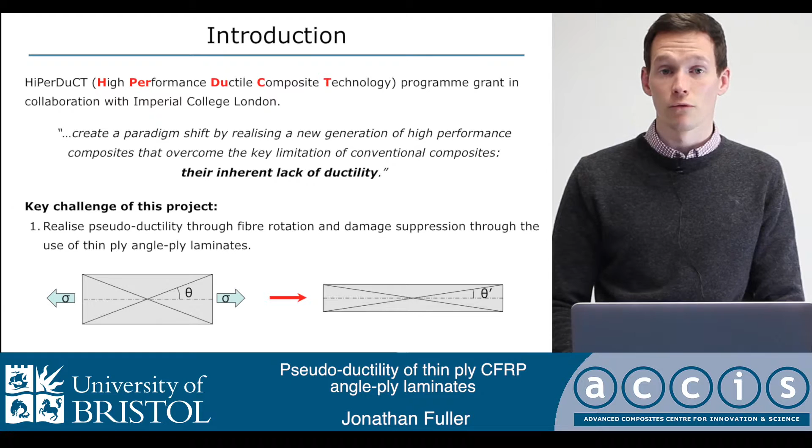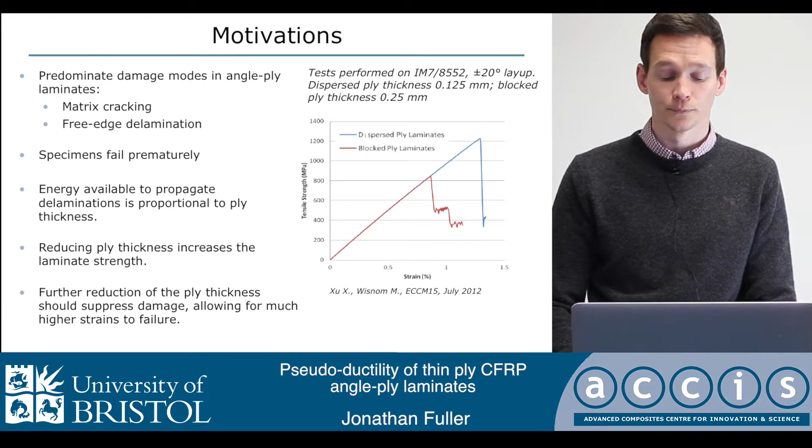So the material I've been using for this work is a carbon fiber epoxy prepreg of 0.03 millimeter ply thickness. The thing to note here is it's a very low volume fraction of 42%, which then leads on to the rather low Young's modulus shown by the mouse. And the other thing to note is all the strains have been captured using video extensometry.

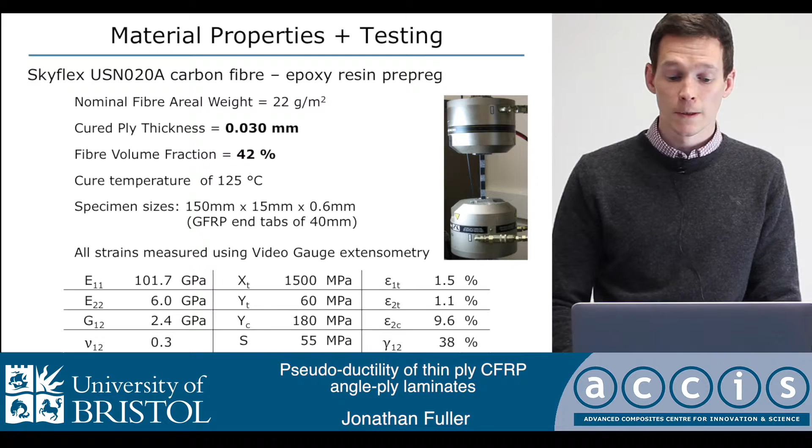So initial results characterizing the material showed that this is a plus or minus 45 laminate, and here we've got highly nonlinear response with strains in excess of 20% to failure. Also, the inset picture shows that there's large necking at the end tab region, which is a metal-like behavior, showing something similar to what you might get in a ductile material.

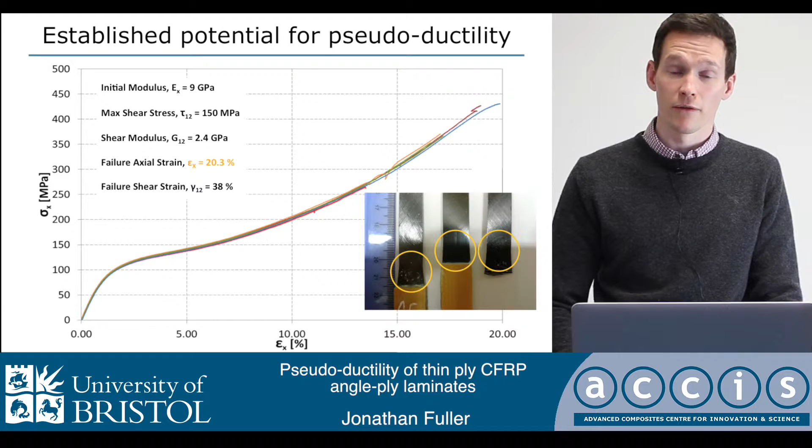The thing to note, though, is that the initial modulus is only 9 gigapascals, which is low. So the idea we wanted to try was, can we create a similar behavior but increase the initial modulus? So experimental testing and then analytical modeling showed that it is possible to do this with this material using a plus or minus theta 5 symmetrical configuration.

So in the graph there's 25, 26, 27 and 30 from left to right shown, and then CT images on the right hand side of a plus or minus 30 and plus or minus 45, both showing that there's at failure absolutely no large scale damage in the specimens, which told us that this concept does actually provide the results that we wanted.

So homing in on a particular configuration, I chose plus or minus 26 degrees, and you can see here Young's modulus is 35 gigapascals and the strength of 950 megapascals. And then the epsilon D at the bottom there of 1.4%, that's a pseudo-ductile strain, which is very promising.

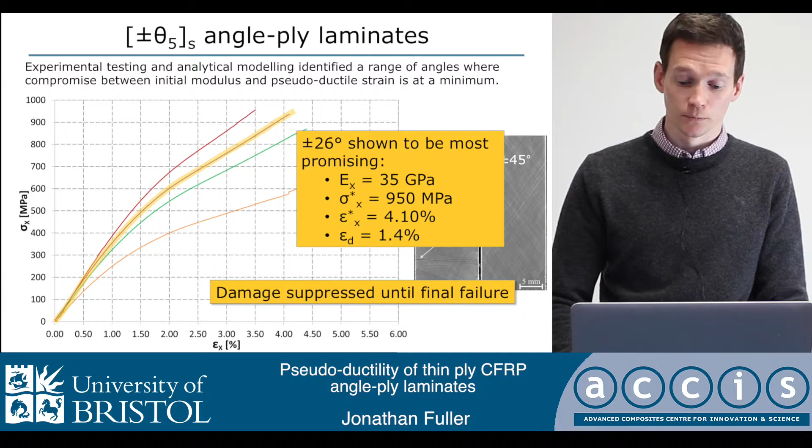So moving on, we decided that we'd combine two aspects of HiPerDuCT's work. My work with the nonlinear angle-ply laminates, and then other work which has been done by Czel and Wisnom on glass-carbon hybrid laminates, and using a thin ply carbon of the same material that I've used.

The nonlinear stress strain curve that they managed to produce is shown on the right, the lower stress strain curve, and then the picture at the bottom shows the sort of tiger stripe pattern, as we're calling it, which indicates that the carbon layers are fragmenting and then delaminating locally around the fractures of the carbon, but not propagating and not joining up, which is a key point which creates this tiger pattern.

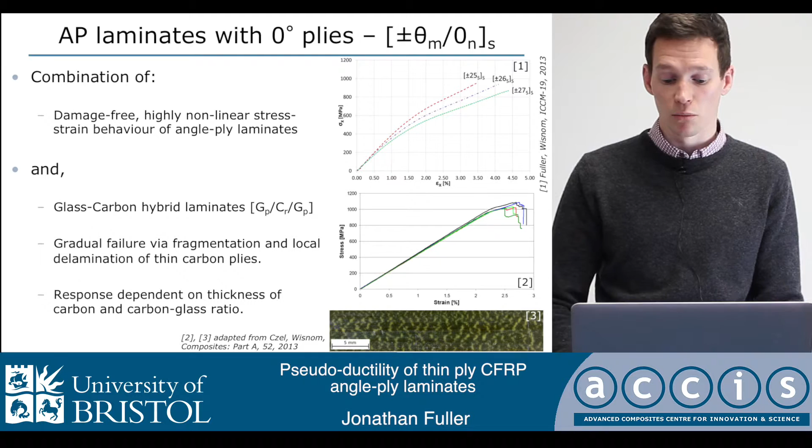Now, this behavior can be adjusted or tailored depending on the ratio and the absolute thickness of the carbon and glass ratio. So it gives great control over the behavior and then the stress strain curve that we can produce. So coupling these two, we get a response very much like the one shown here, a metal-like stress strain curve with an initial largely linear loading up to about 2%, and then a plateau 700 megapascals up to in excess of 800 megapascal strength after further loading.

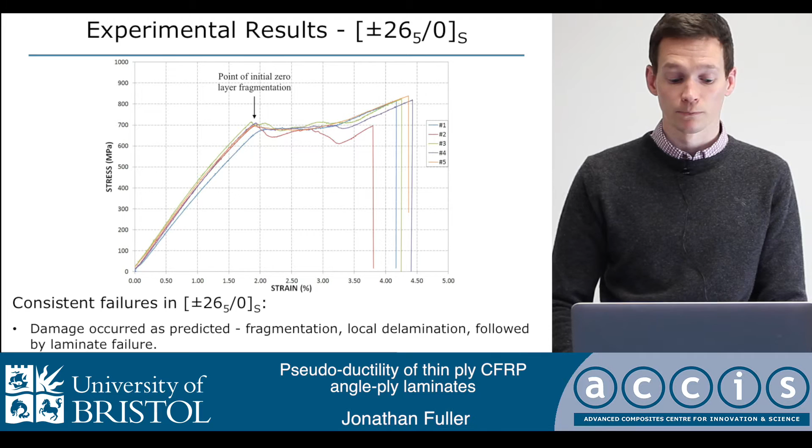This further loading takes place after fragmentation and delamination of the zeros, and then the angle-plies, which remain relatively undamaged, continue to take the load up to a failure which is similar to the value of the angle-plies by themselves. So obviously, how do we know what damage is in the specimen? It's key to know that and how it develops.

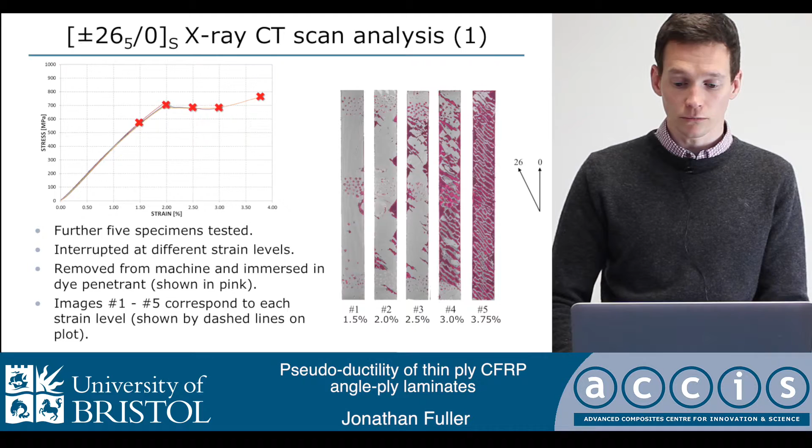And then zooming in on these specimens further, we were able to do a higher resolution scan on the two shown on the left. And this gives us a bit more evidence of fragmentation. So the yellow and blue insets on the central image show, hopefully you can see these lines indicated by the mouse, and their fragmentations in the center of the specimen in the 0 degree layers.

To the right of that, we can show that the specimen which has been loaded up further has actually developed these large white areas of delamination where the dye penetrant has got in. And also another key aspect of this image shows that the damage is solely residing in the midplane of the laminate, which backs up the initial work of the angle-plies suppressing damage all the way up to failure.

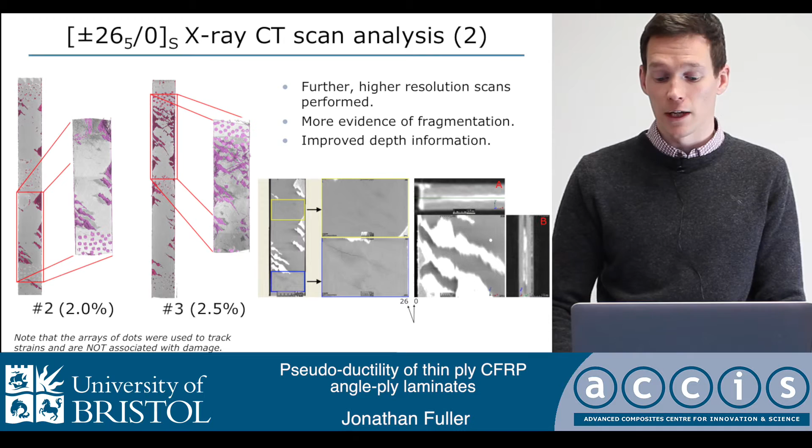So further analysis and testing of these configurations using the analytical model, which is shown in the stress strain curves by the dashed line, shows us that we can have control over not only the fiber angle of the angle-plies, but also the number of zeros at the midplane. So the plus minus 25 4 pairs with a 0 symmetric has 2 zeros at the midplane, but the plus minus 26 with 3 pairs only has a single 0 at the midplane, which is denoted by the underline under the 0.

And just by changing the fiber angle and the number of zeros, so the ratio and the absolute thickness, we can change the behavior. So the top is showing fragmentation and local delamination around those fractures, and then the bottom graph is behavior which shows no delamination and purely fragmentation. And obviously you can see here there's some inconsistency in the results, but overall the analytical modelling gives a very good prediction of the response that is actually seen experimentally.

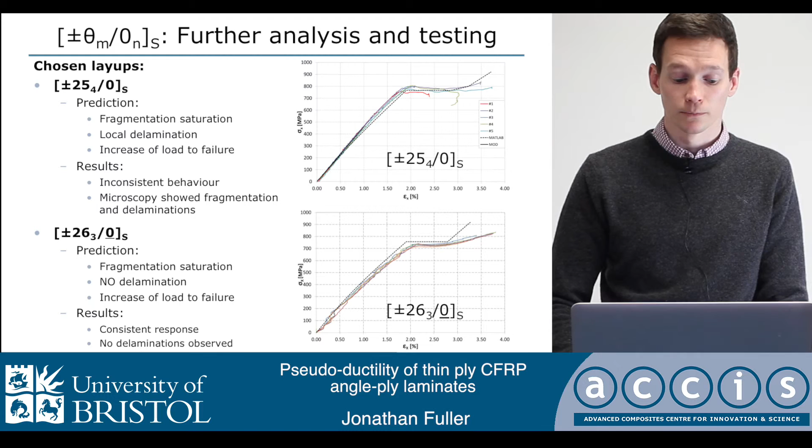So to conclude, we've managed to show that thin ply, angle ply laminates have suppressed damage until final failure, which allows large fibre rotations to occur and a highly nonlinear stress strain behaviour. Coupling that with a fragmenting 0 at the midplane, we've been able to show an exciting metal-like pseudo-ductile response, which can be tailored via the adjustment of the ratio between the angle ply and the 0 layers and the absolute thickness of the zeros.